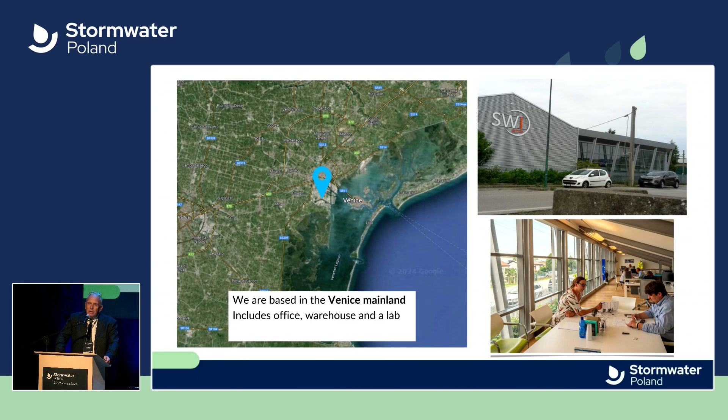Okay, going back. So we started in Venice 25 years ago, because the law was different, because the usual approach of stormwater management was not working. It was not working because the law was enforcing people that hydrodynamic separators were not able to guarantee the respect of the environment, because the water body was not protected. We started to work on the highways, and we divide - we are strange because we are a consultancy, construction, and maintenance company, and we start to talk about highways.

Highways, we talk about two kinds of impact. The first we call chronic impact. The chronic impact is the impact of pollutant that we can expect to find in the runoff from the highways.

That is not what Italian rules were looking for. Italian rules meant sedimentation, maybe some oil-water separation, that's all. There is no international study about the presence of oil on highways. So we started to study what the pollutants were, and we found metal, dust with metals, and any kind of microplastic. Microplastic is lower than 100 microns, so microplastic is a huge problem for the future. These are the main pollutants that we can find, and we call them chronic pollutants - the pollutants you can expect to find.

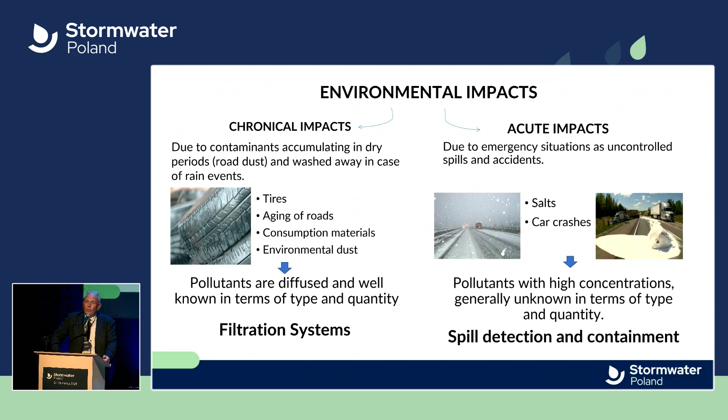And then there is another impact, usually related with stormwater, but more with the stormwater sewer - the acute impact. On any highway, any street, there can be an accident, there can be a spill, depending on the accident, or some people put oil, any kind of liquid. This is a very strange situation because it can have any kind of pollutant, very difficult, and all these pollutants impact the quality of the water first, and then it's very difficult to understand when they're arriving and which kind of pollutant is arriving.

The acute impact, as I told you, is something usually not addressed by rules. There is no law in Italy about that. There is some technical standard, but there's no European standard on that. But there are the accidents, there is the cleanup of the accident, there is the cost of cleaning after a big spill or a small spill.

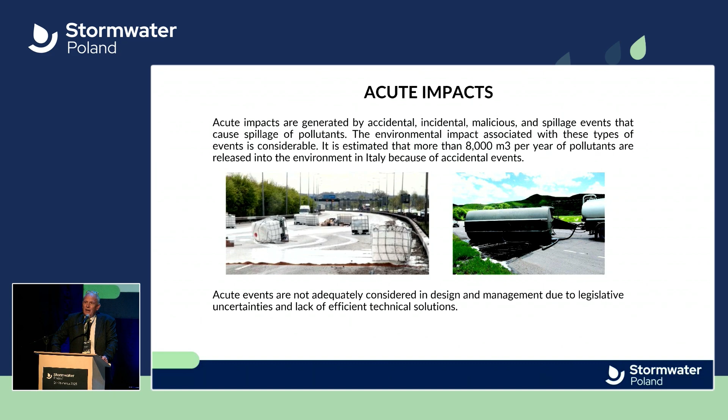In Italy, an estimated 8,000 cubic meters of pollutant every year go directly into the environment, with big damage. And depending on the fact that Veneto, as I told you before, is a strange region - strange because it's small, with everything - we also have 6 million people who drink water from the groundwater. So the idea of protecting the environment is very high.

So we start talking about managing the acute impact. How can we manage it? We need something able to understand if the liquid arriving to the system is stormwater, chronic stormwater, or an acute impact. If the water is okay, it runs to the water treatment, where we use filtration media with adsorption to remove the pollutants we expect to find. But if there's something wrong, we need a system able to push the water into a spill detection tank.

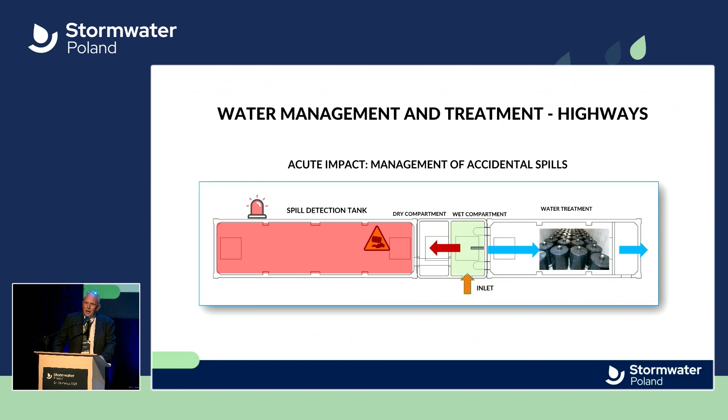The first project was Passante di Mestre. As you can see, it's exactly nearby the lagoon, and the water runs directly to the lagoon. It was built in 2006 after 25 years of discussion.

Because Veneto, like Italy, has a big need for highways, but we also have a very strong NIMBY attitude - not in my backyard. No one wants a highway behind their city and home. So the idea was 32 kilometers of highway.

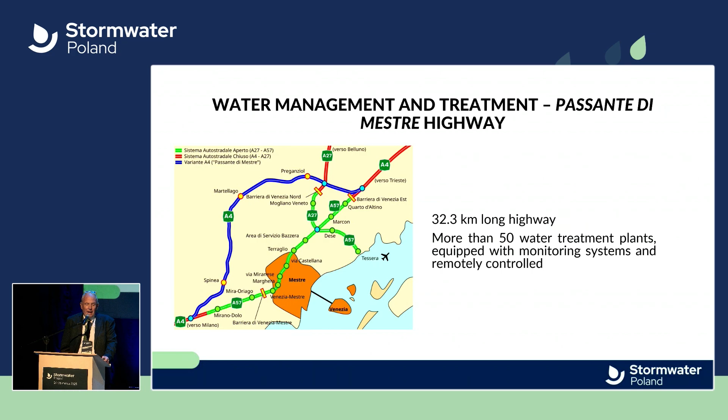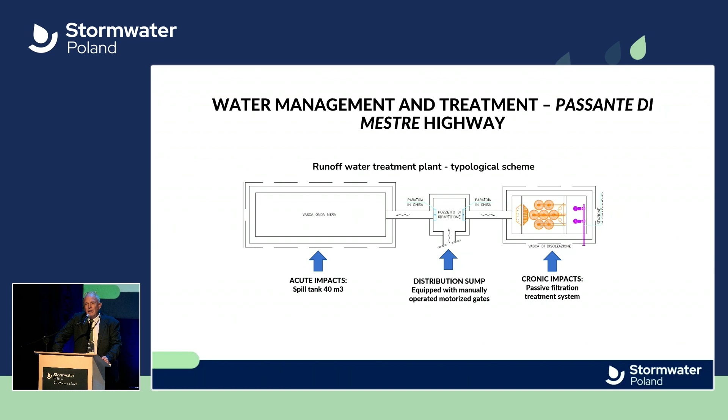We have 50 water treatment plants. This is the first project where we installed a system to prevent spills, with a lot of mistakes, because in the original plant there were manual gates. The idea was, if there's a spill, a man comes out from the office, runs there, and closes the gate. This is not working - the liquids go directly into the environment. But it was the first idea.

So we did the revamping of the system two years ago, based on our idea and technology. We switched from a manual approach to a digital approach. We put in our technology and system able to detect any kind of spill, and we changed the gate for something that didn't need reaction time, which was the mistake of a gate - a gate needs a man running when there's an accident at the place.

If there's an accident, we have other priorities. The first one is the people. The second one is reopening the highway. Also the fire department doesn't take care about the quality of the water, so the gate was not working, and we cannot think that a simple gate can work.

So we need a very fast reaction time, less than 1 second. Second, we cannot think that a man in a control room can switch the system. We need a standalone machine able to make the decision that something wrong is happening.

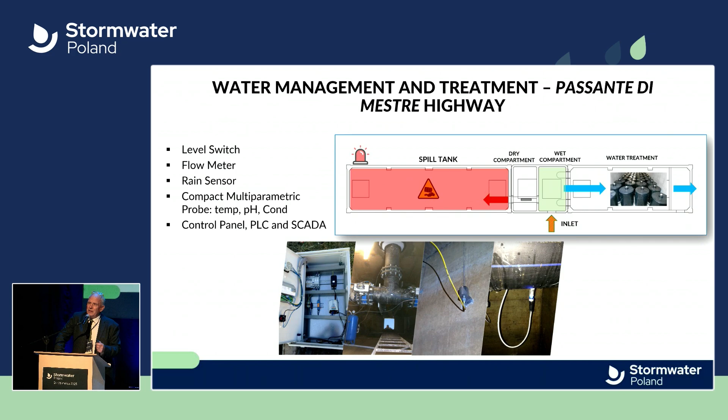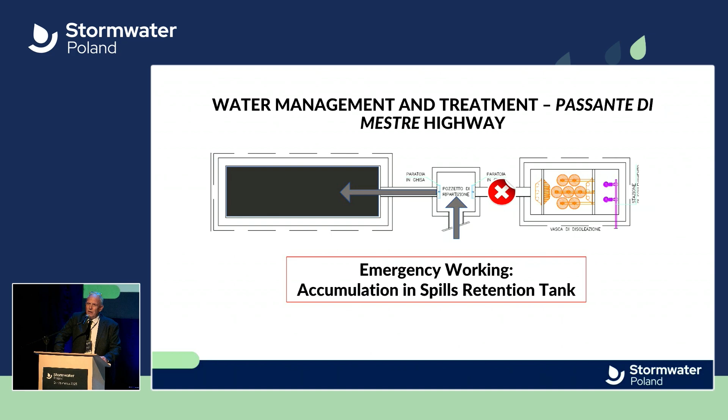Third, we need a pneumatic gate, and also some connection with the data room, because even if the system works in standalone logic, we need communication. So this is the work.

We change the gate with a pneumatic valve. We install the SWIGroup, our technology able to detect any kind of spill, and it's not only a problem of sensors - sensors are now common in wastewater, and starting to be common in stormwater too. But stormwater, in my opinion, doesn't need only sensors. It needs interpretation of the data, a PLC with software inside able to understand if something abnormal is going to happen. If you think, 60% of the time it's not raining in Venice, but we can still have a spill.

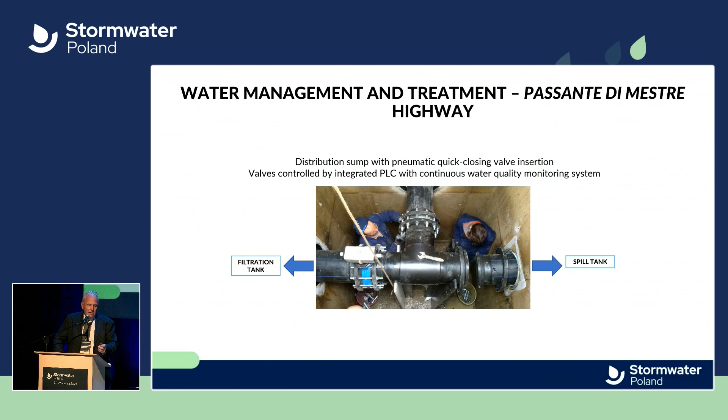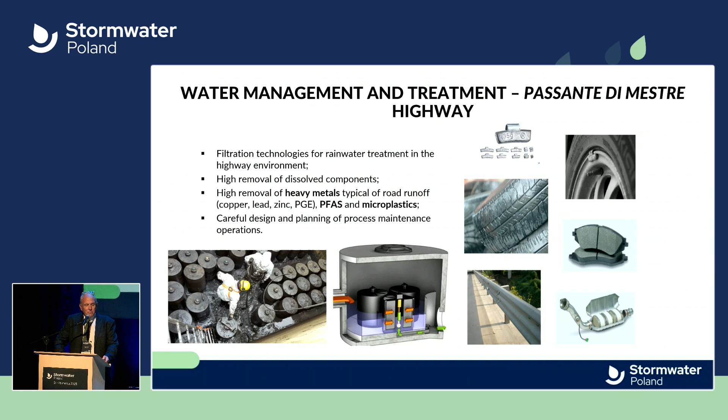So this is water management. I told you we are using filtration, and the filtration is based on the specific pollutants that we think we can have on the highway.

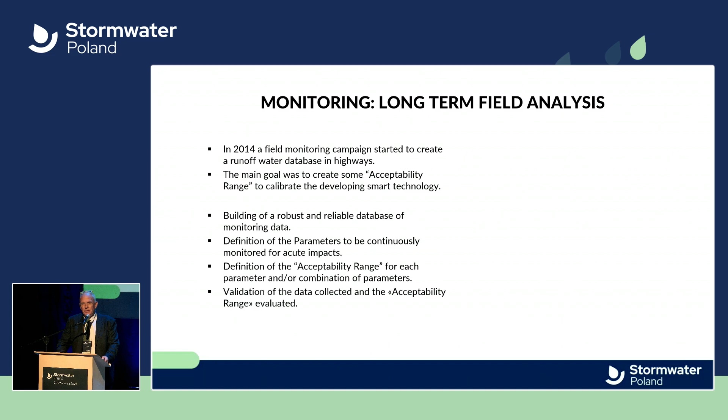I'm running a little because I see the time, and these are 25 years of my life, so it's difficult to fit into 15 minutes. We also need to study, because in scientific literature there's very little. So we are lucky to be in our region - we have a lot of universities, and we have the company managing the highway that opens its doors and shares data with us. This is also unusual in Italy - usually they don't like to share information.

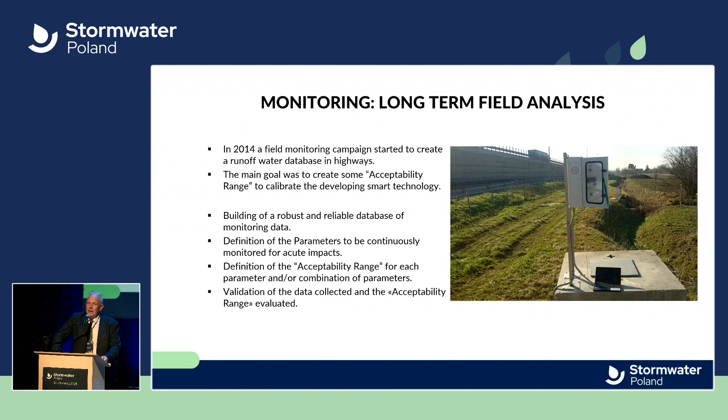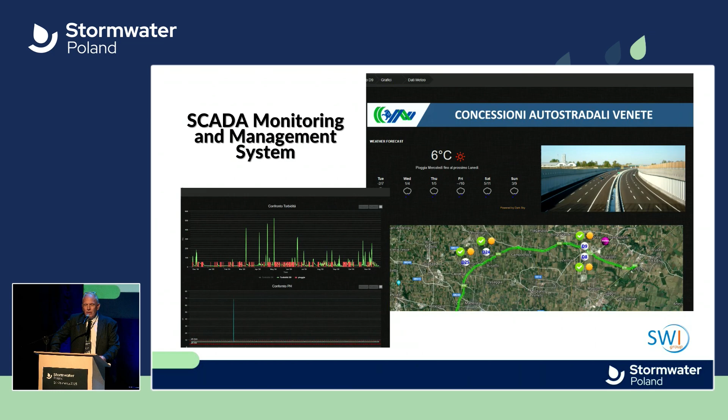So we developed 3 years of monitoring of the water to build a curve of acceptable water coming from the runoff in the highway. All the communication goes to a SCADA system that lies below the SCADA of the highways, and all the data are developed from the PLC in each system, but the SCADA has all the history, and any situation that is not correct.

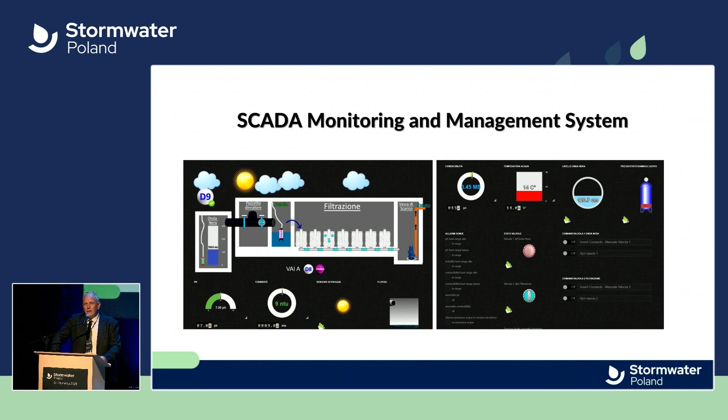They can also move all the system from the control room. I told you before, it's a standalone technology, but in the control room, if they know something wrong has happened, they can close and switch to the system to get the water.

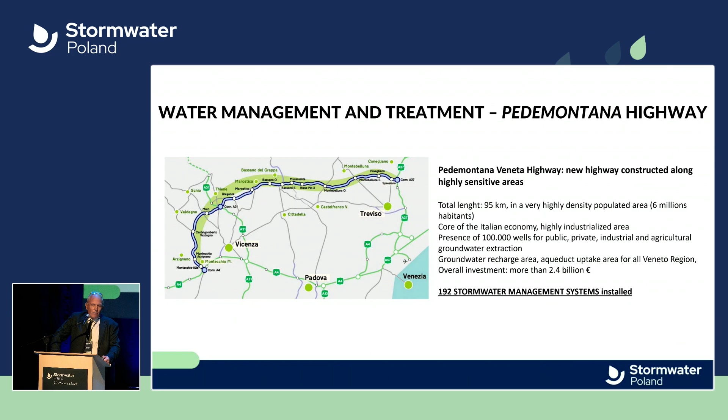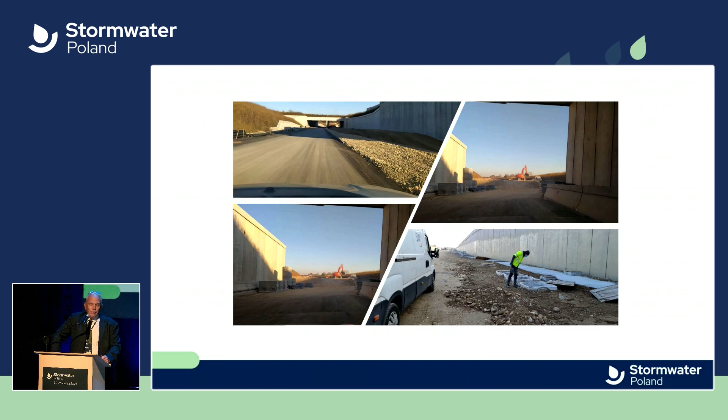But our biggest project is the Pedemontana Highway. It's a 95-kilometer highway, 2.5 billion, running down from the mountains in an area with recharging of the groundwater. 37 cities put prescriptions. 20 years probably of project, from project to beginning, and it's a greenfield, completely new highway.

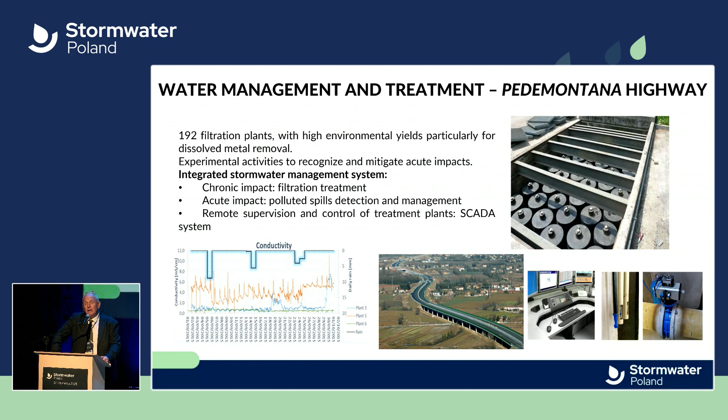They asked us to develop something in the same direction as Passante, but more sophisticated. So we developed more things. This is a greenfield, so it's not retrofitting an existing one, more simple in some way. It's a big investment, but compared to the highway costing 2.5 billion, the investment for stormwater is nothing. The protection of the environment is very important, because we also have 2 mineral water companies getting water from the groundwater in our region.

So if damage happens, the damage can be very high. Also in Pedemontana, all 189 systems are connected with the SCADA. All the information is transmitted to the SCADA, but each of these 189 systems is standalone, can work and decide everything without intervention of people.

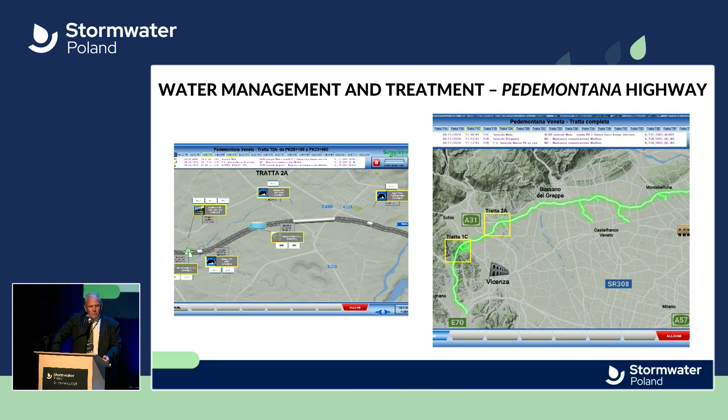We put in other things, because stormwater management in Italy, not only in Italy, has another small problem: maintenance. Anybody can put down a system, but nobody takes care, or few people take care about maintenance. So we made integration with software inside the PLC in each system to manage the maintenance.

We believe this no-paper maintenance in the Pedemontana Veneta can cut, I'm sorry to say, 2 people in the office. If you think about making maintenance on 189 systems, you need people, you need paper, you need order. You lose the order, you don't make maintenance at the right time, and maybe the valve doesn't switch and an accident happens because of a delay in maintenance.

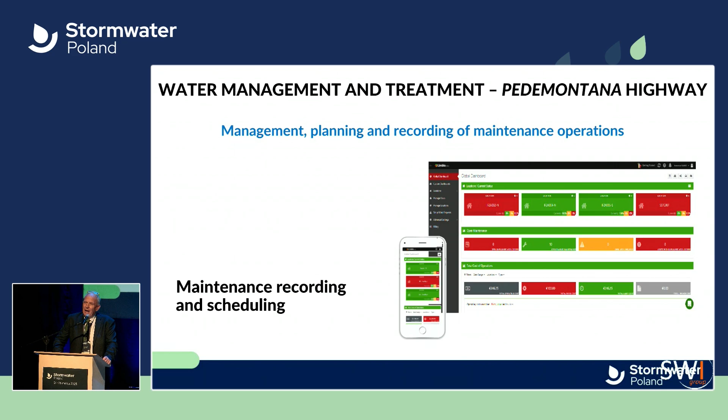And depending on the responsibility of the general manager, they don't like it. So the software can help them have control over the maintenance.

This is our last project, because now in Italy we are running and building systems everywhere. This is the Brebemi highway, from Brescia to Milano. They have installed 62 treatment plants over 62 kilometers, 180 systems. They are traditional systems, 180 sedimentation systems, complying with rule 858.

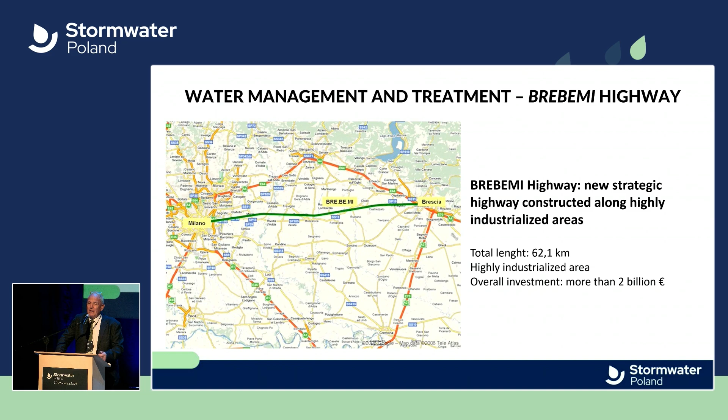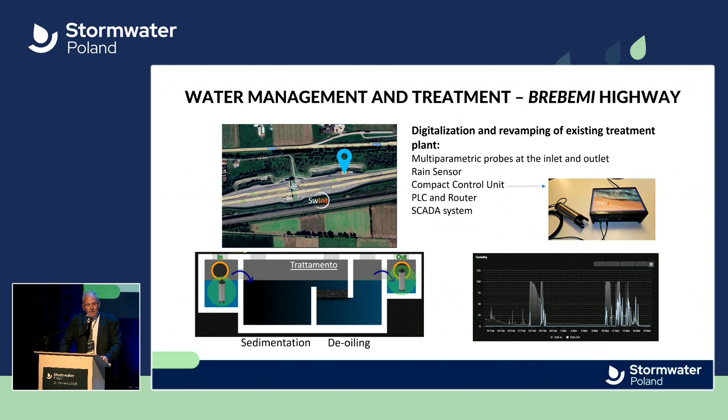So they need to do some maintenance. They need to clean each one of the clear water systems every 5 years, but they don't have any information about whether they are working or not working. So we did retrofitting, and transformed this system into a digital one with another small black box machine we call SWInt, a very simple plug and play system that can connect all the systems on the field.

I have 10 seconds to say that this is not perfection, this is a long way, but I think we have to tackle the real pollutants: microplastic, PFAS, metal, and move from simple things to more engineering things. Maintenance is another key, and then highways and streets, but not only - ports and airports, managing spills carries the same weight as managing stormwater.

Last thing: stormwater in Italy, like in other places, is a son of nobody. Little money, not much interest, now it's growing, but there is no interest about who's going to pay the bill. Having a performant system instead of others can cut the cost if something happens. Thank you.